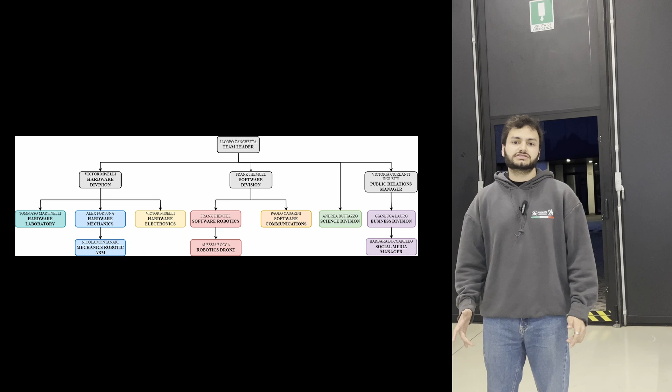Our organization is divided into 4 divisions: hardware, software, science, and business, each led by a dedicated leader. Together with the team leader, the public relation manager deals with partnership relationships and finances, and then 2 coordinators supervise the technical side of our team, ensuring correct communication among the members.

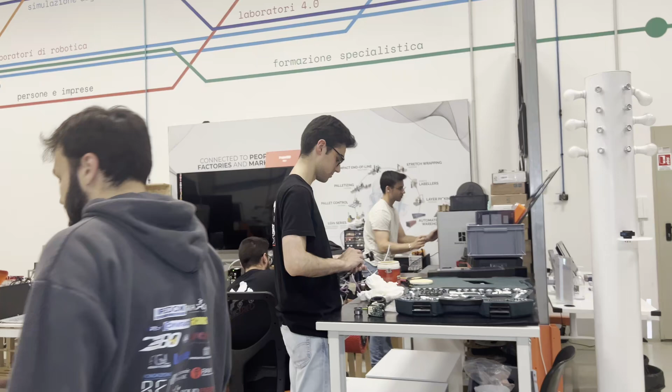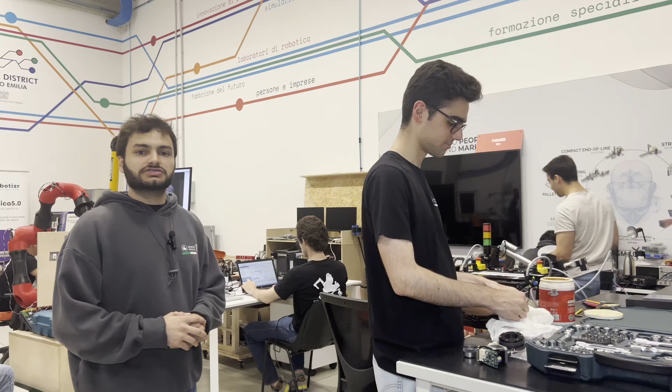Moving to Project Red people, hardware is divided into 4 parts. We have the mechanics division led by Alex Fortuna, focused on the construction and development of our Sirio rover and its subsystems. Then Nicola Montanari leads the manipulator and end effector design in its robotic arm division.

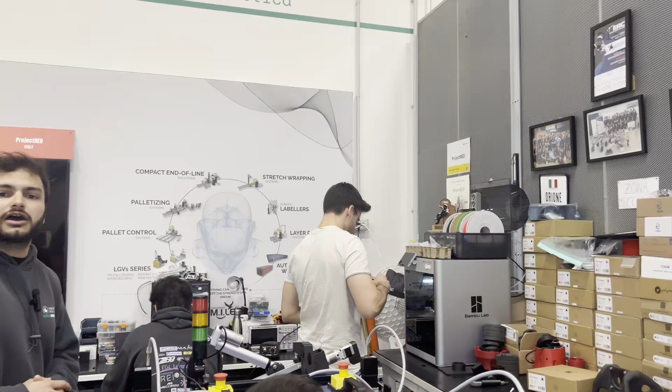The laboratory division is led by Tommaso Martinelli, which focuses on our laboratory organization, travel logistics, and the construction and crafting of useful structures such as test benches and our ground station.

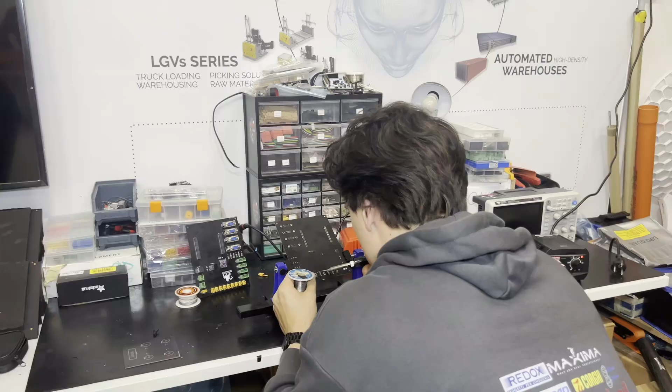The electronics division, led by Victor Andrea Miselli, focuses on the design and development of our entire rover electric system and its subsystems, such as, for example, the safety system design.

Moving to the software side of our team, we have the communication division led by Paolo Casarini, which focuses on the motor control software design and the development of our communication protocol system.

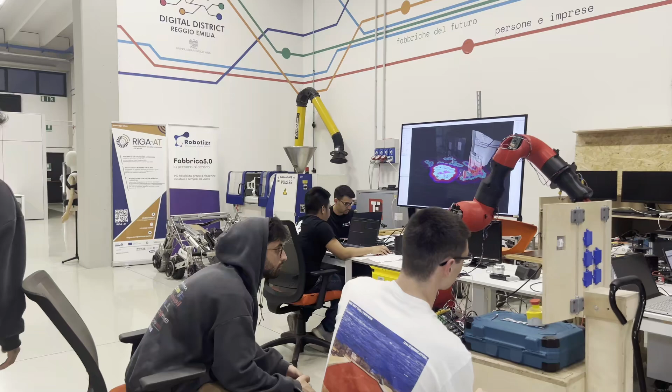For the robotics side, we have the division leader Frank Jhemuel Villanueva, who focuses together with the robotics division on the design and development of algorithms and interfaces to control our rover and its subsystems.

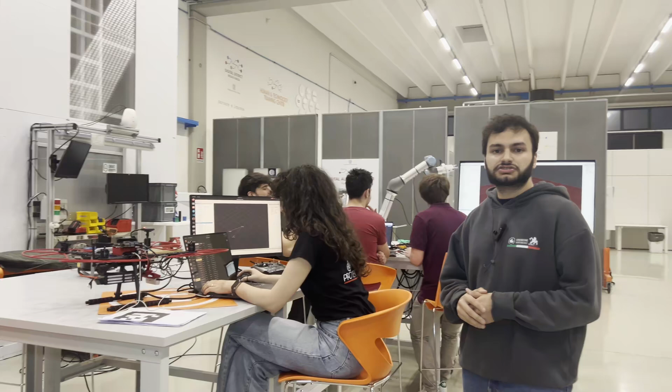Finally, for the technical side of our team, we have the drone division led by Alessia Rocca, which focuses on the development and construction of our new Nebula drone and its autonomous flying routines, and also its autonomous auto-landing safety system.

Going to the organization side of our team, we have the business division led by Gianluca Lauro and Barbara Buccarello, which focuses on our partner relationships, on the development of our website and educational rover blog.

But still, the ERC is the most significant event for us, not only because we can push our work to the limit and grow as a team, but also because we can share our passion with all the world.

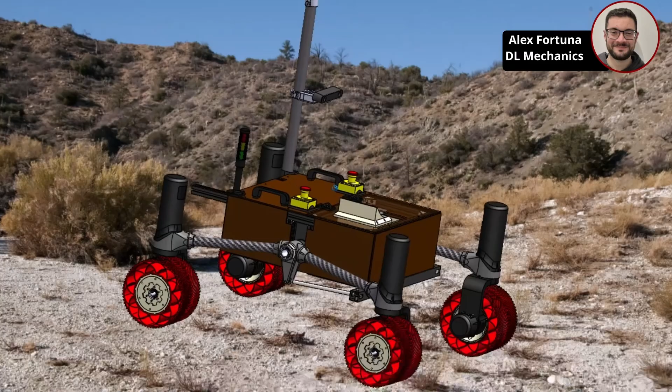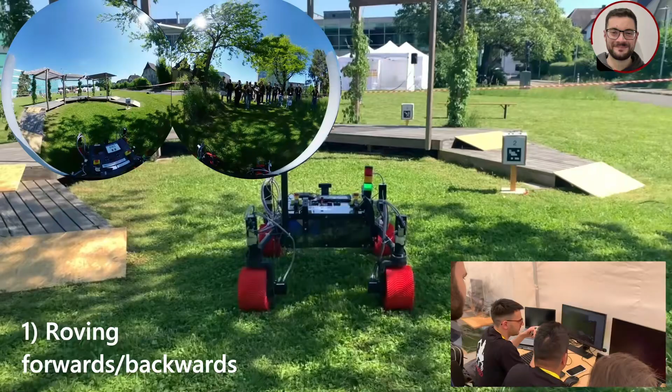The Zero Rover featured a simple buggy suspension with two V-shaped flanges pivoting at the chassis center. This year, we keep the core design but upgraded key elements. The carbon fiber arm is now mounted with glue and a screwed flange, making assembly easier and more reliable in case of adhesive failure. We redesigned the four steerable wheels, now larger, stronger and better shaped for improved obstacle handling and terrain adaptability.

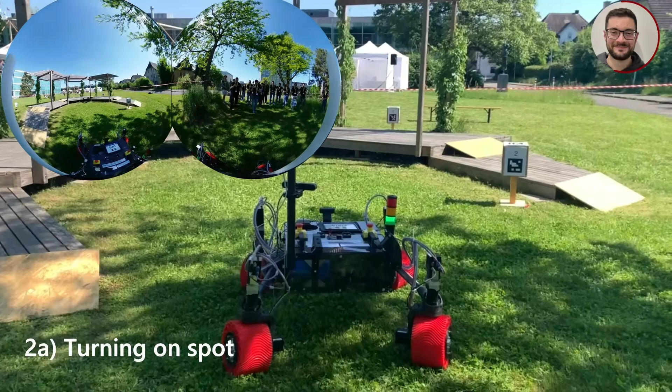The aluminum chassis platform, mounted on top of the suspension, still uses a square profile, but we adopted lighter parts and also replaced the single axle with two half shafts to cut weight and free up center space for electronics. The design is useful for fast chassis reconfiguration and adjustment.

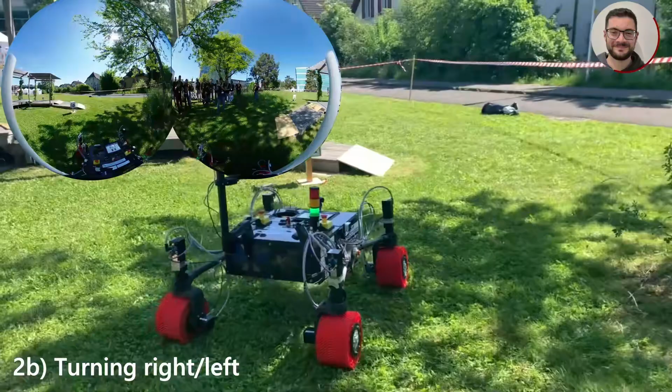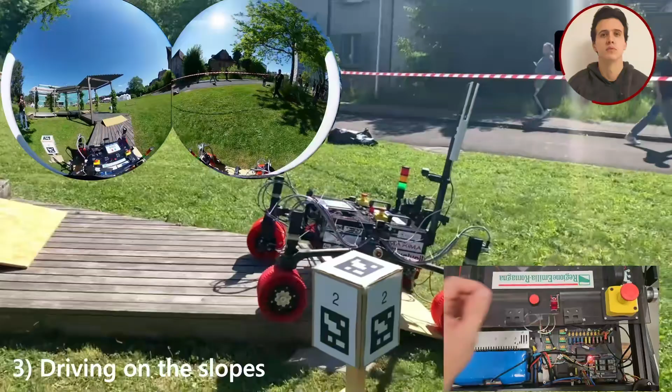In the preliminary phase, the safety system was tested on the bench with a switch. The logic will be powered and will not be interrupted by the emergency button, ensuring that the signal with the ground station is not lost.

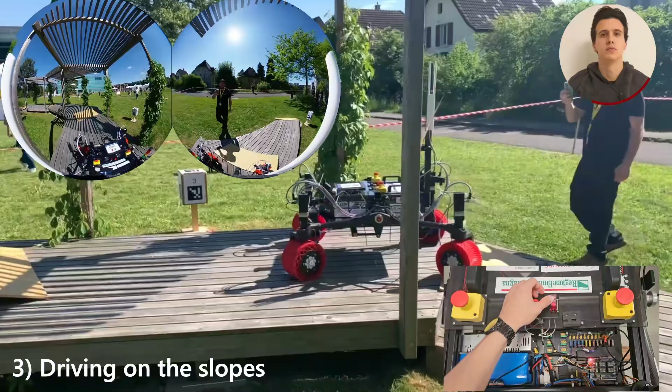The green button will activate the 22-volt power supply that powers the motors of each system, and it can be interrupted by the actual emergency button. The safety system will be integrated into the PCB for the power distribution.

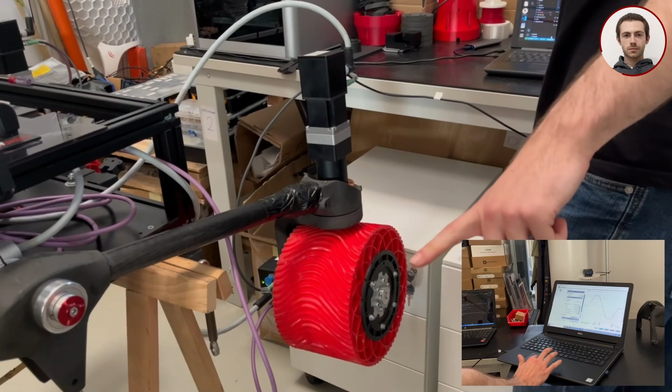The rover traction relies on Maxon brushless motors. A USB connection is established with the first node, which acts as a gateway and facilitates master-slave communication with all other nodes on the CAN network. We utilize software provided by the company for the setup and tuning of the traction and steering motors.

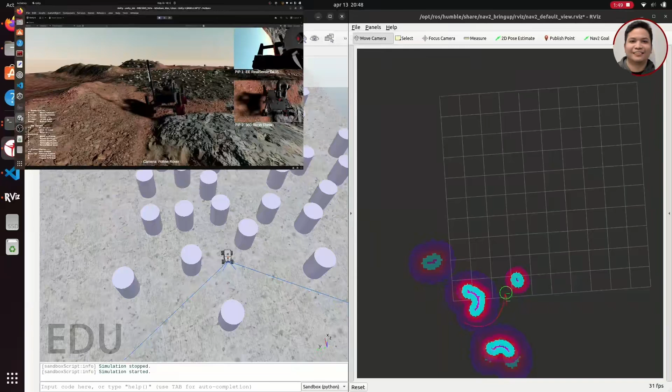The robotics division relies on Unity and CoppeliaSim to create realistic environments like the Mars Yard terrain of the competition. In addition, they allow us to simulate physics-based robot interactions and validate sensor data integration with autonomous navigation algorithms.

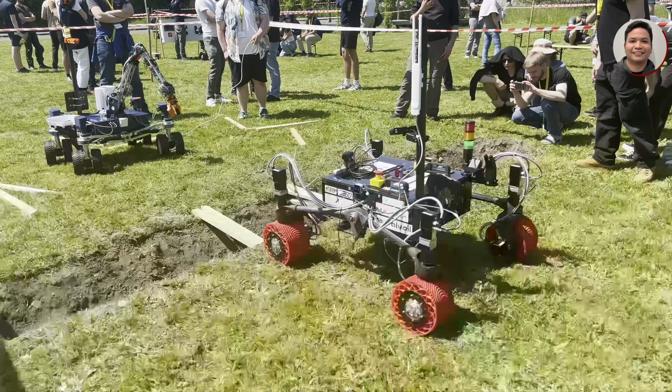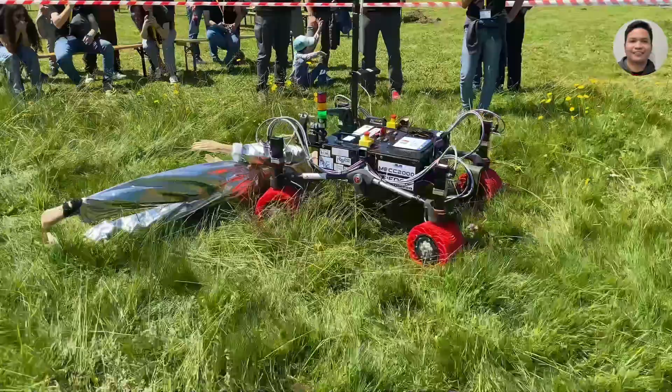Our rover is equipped with 4 steering wheels which will be controlled over the ROS2 framework. We developed flexible locomotion modes including crabbing, turn on spot, and swerve. Each mode can be dynamically activated based on the terrain conditions or the task requirements, giving our rover exceptional agility and adaptability.

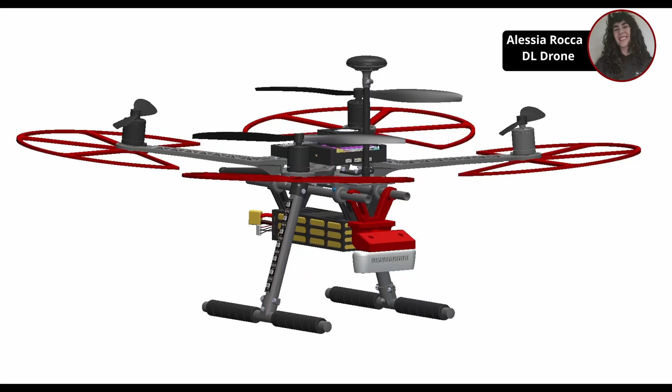To meet the specific needs of the European Rover Challenge, we designed and 3D printed custom components, including a camera support for optimal positioning of the vision system, a battery holder to ensure secure placement and proper weight distribution, and a propeller guard to improve safety during outdoor testing. These elements enhance both flight stability and system reliability during field operations.

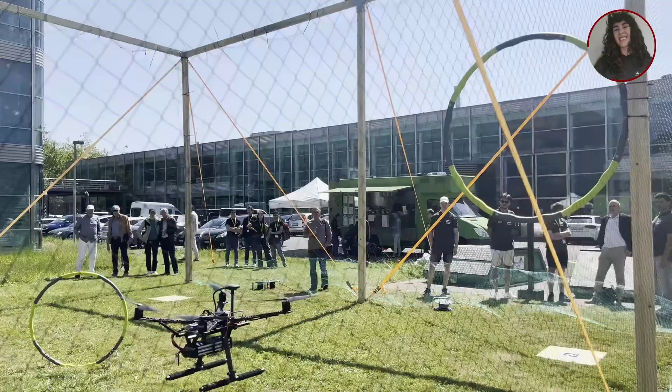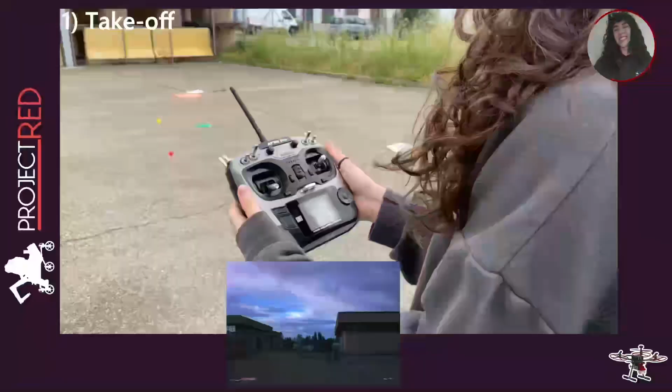To support autonomous navigation, our drone integrates a vision-based system. During flight, the onboard computer processes the live video feed to detect Aruco markers in real time. The detection and pose estimation are implemented through ROS code, which extracts the marker ID and relative position with respect to the drone's frame.

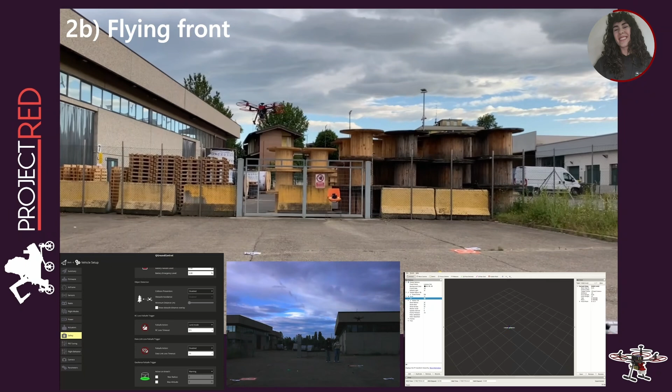We also use QGroundControl as a mission planning and monitoring interface. It provides real-time telemetry, parameter tuning, and essential safety features. We can also upload predefined missions, track battery status, and verify system status during flight.

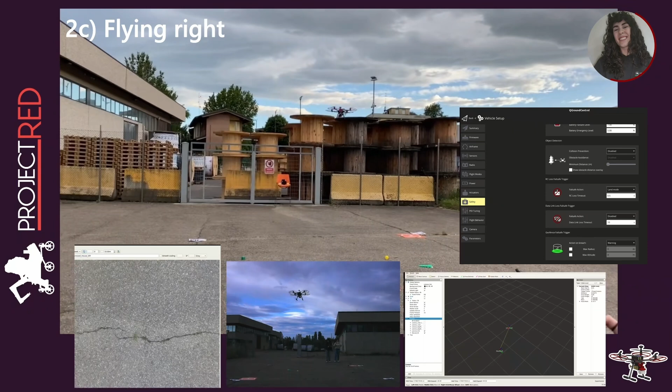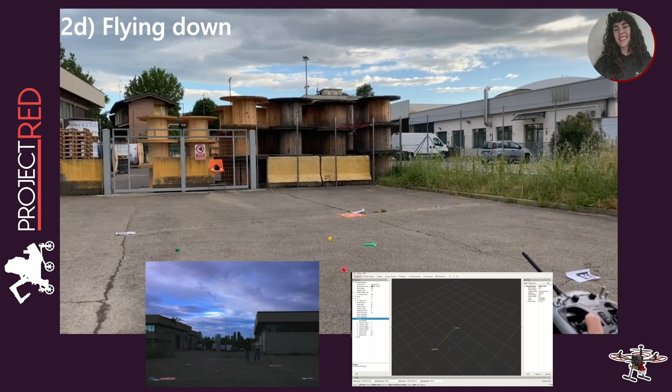Even if the test was not autonomous, it clearly demonstrated the drone's capability for stable liftoff, controlled flight along all 3 axes, and precise landing. We are now preparing to perform the same tasks autonomously as soon as the new components arrive. Also, the upcoming MATLAB workshops will support us in implementing and tuning the autonomous control algorithms.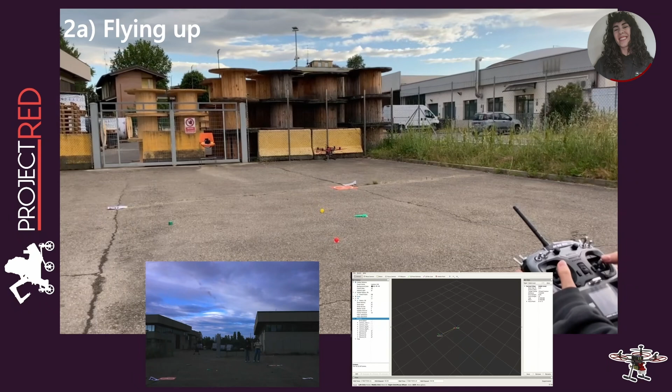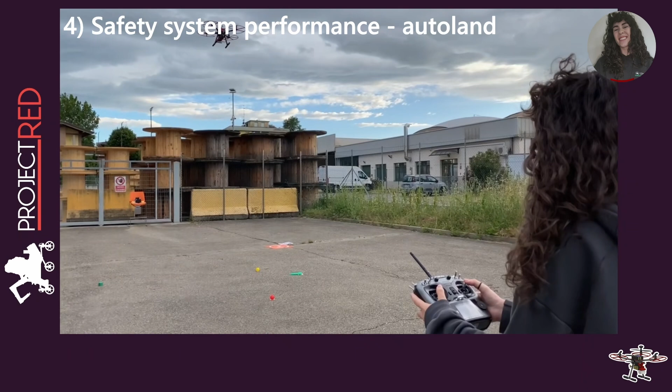Software mechanisms via Q-ground control trigger automatic landing if battery is low or communication is lost. Additionally, the pilot can instantly cut motor power via physical emergency stop on the controller or activate the auto landing procedure. During the task, there will always be a dedicated pilot ready to activate the shown emergency procedure in case of necessity, as well as a second team member monitoring the autonomous flight operations and system status from the ground station.

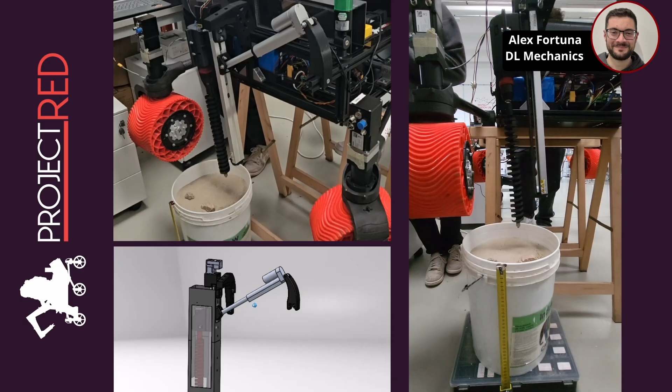This year, we redesigned the sampling unit, introducing a more compact internal storage case integrated with the driller, while keeping the external tray system, which still supports the sampling weighting and handling. The driller retains its tilt and the core mechanics is the same as last year, but is now fully 3D printed, improving flexibility, reducing weight and simplifying production.

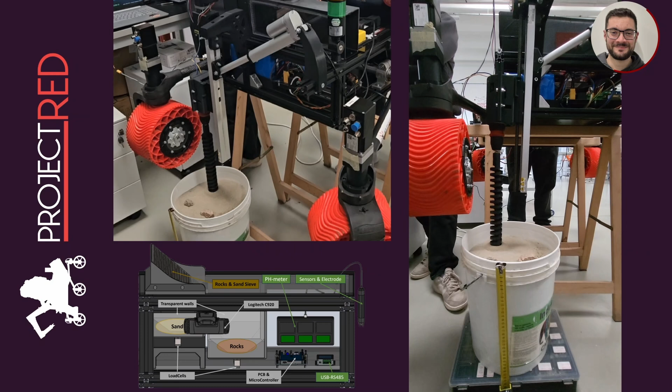We also introduced a modular science box system, 2 swappable units at the back: one for solid samples like sand and rock, and the other for probes and liquid, with sensors for temperature, pH, humidity, and conductivity. This update improved modularity, field efficiency and science capability.

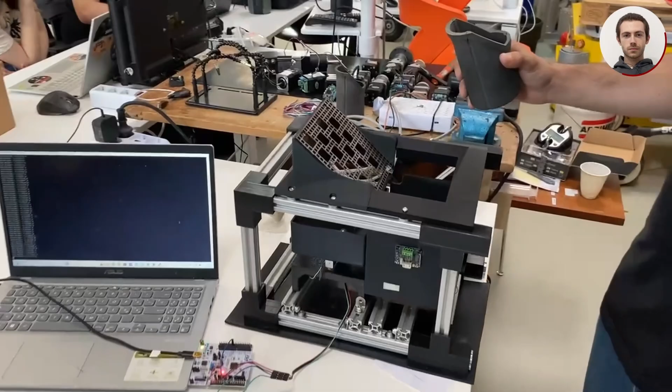The control of the driller is mainly divided into 2 parts: the control of 2 DC motor linear actuators wired with 2 shields placed on the STM32, and a stepper motor of the same type as those used for the robotic arms, controlled via CAN Open protocol. The load cells communicate via I2C protocol with a module that acquires raw signals from the strain sensors. The purpose of this system is to simulate scales for both sand and rocks.

This year, we completely redesigned our 6 degrees of freedom robotic arm to integrate a new generation of stepper motors with built-in drivers that communicate with the CAN Open protocol. We also simplified the mechanical structure, reducing the number of components by nearly 30%.

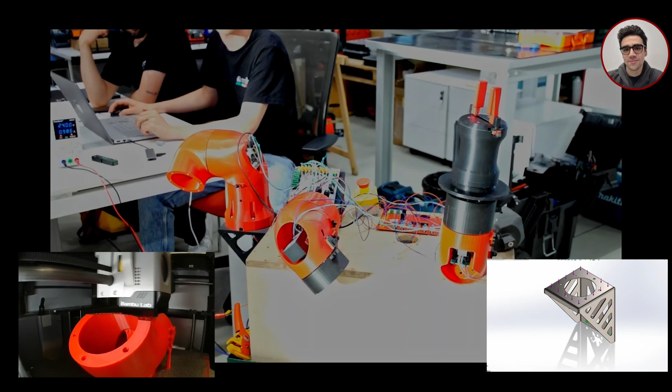All structural parts are 3D printed in-house, using ABS and PA6-CF. This results in an arm that weighs just 7 kilograms, offers a reach of 1.5 meters, and can handle a payload up to 3 kilograms.

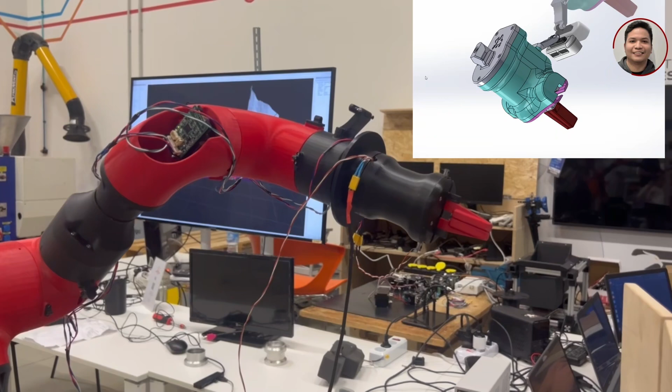We also developed a modular end effector with a universal base and swappable TPU fingers to adapt quickly to different tasks. ROS2 MoveIt framework is used for the autonomous motion planning of the manipulator together with collision checking and grasping procedures. We integrated an RRT planner with a camera mounted on the end effector, enabling us to get environmental awareness for the object's interaction.

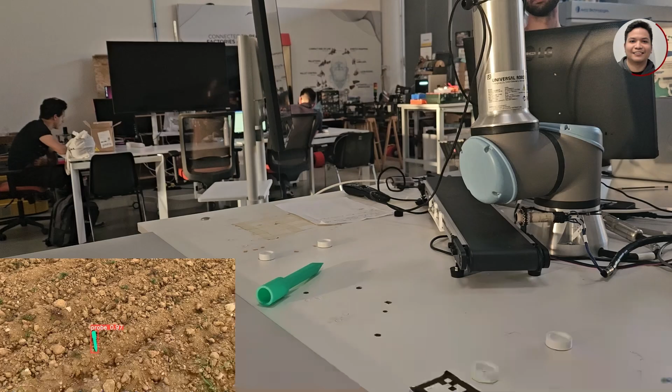We use this for detecting the probes in the task, so we can learn its position relative to the arm using a depth camera. This allows our manipulator to plan precise movements to interact with the probe, whether it's for retrieval or manipulation.